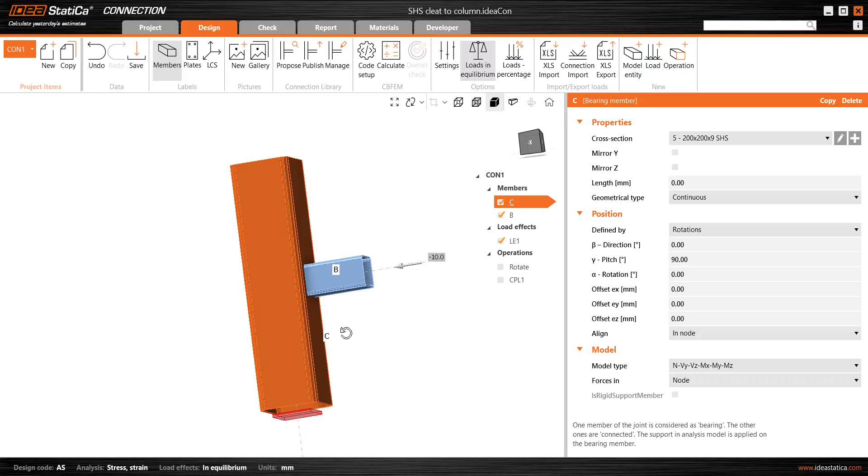It's a relatively straightforward arrangement. I've got a 200 square hollow section column in a vertical orientation and an incoming brace or strut, a 100 by 100 square hollow section. If we attach a connection using a welded cleat to the column and similarly a welded tongue or cleat to the square hollow section, then we find that typically by default we'll have the cleat in a vertical orientation, and the question has come in a few times: how can we rotate that and have the cleat in a horizontal arrangement?

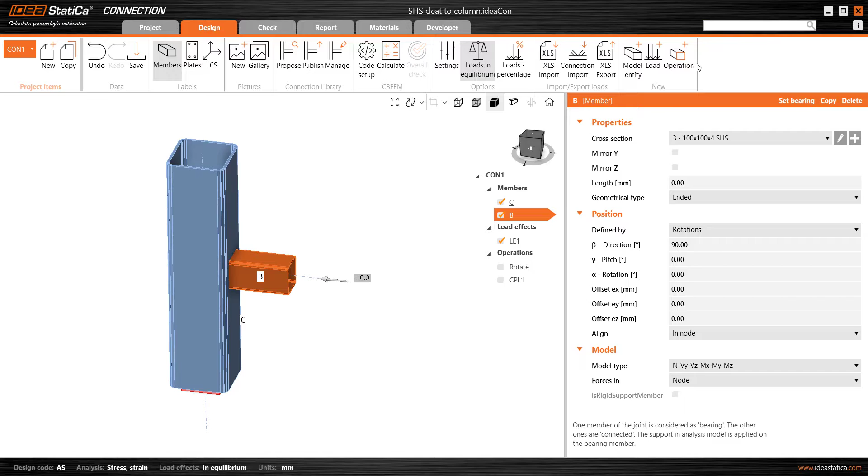Let's have a look at some options that we might try here. So selecting the operation tab from the design menu, we could try a range of different types here. Of course, we can always go back to a very manual setup, but we try to avoid that, simply for speed in setting up the connection details.

We could arrange a plate and weld it to the face of the column, arrange it in whatever orientation and cut it and add welds and add bolt groups and so forth. Similarly, adding plates to the strut itself.

But let's try some more automated operations, and we might try the gusset. We find that we get reasonably close with that, but we don't get control of the rotation. There's some details there that don't quite suit our requirements on this occasion, and similarly the fin plate operation isn't suitable here either.

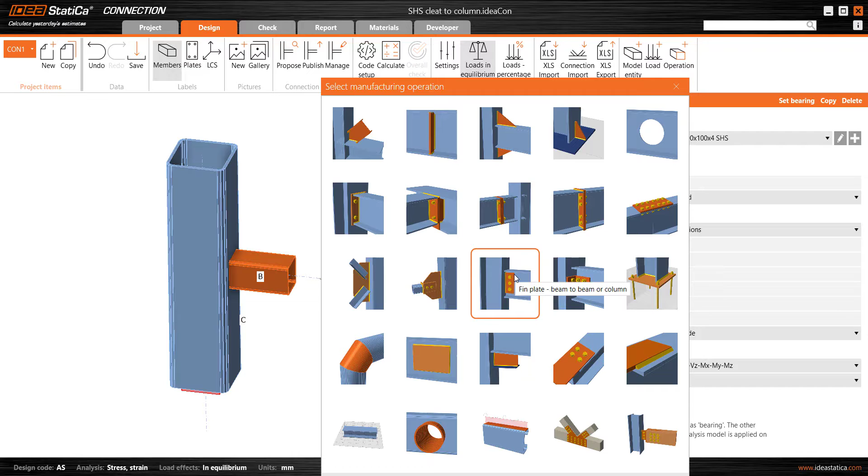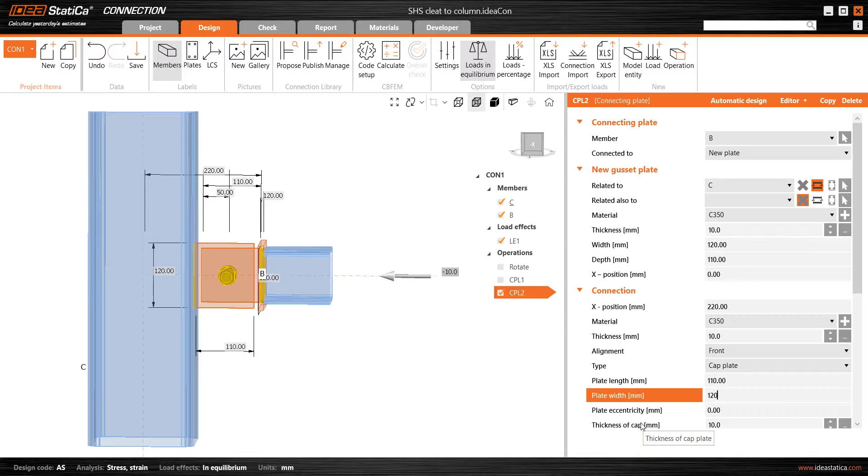Let's try the connecting plate operation, and the setup looks reasonably close to what we want, except we want a different angle of rotation compared to that diagram there. And by default we get quite a deep welded cleat to the column, 250. I'll go to 120, and similarly for the width of the welded tongue there as well.

So I could change the bolting arrangement so we have 2 or perhaps a pattern of 4 bolts. That's all in the bolting details, so I won't go to that at this stage.

But something that might be relevant is the exact line of these members, and depending on the situation, applying some of these connection operations may shift the position of the member slightly, may shift the alignment. So something I like to just be aware of and try to control, particularly if we want to maintain the concentric nature of the connection, is this alignment.

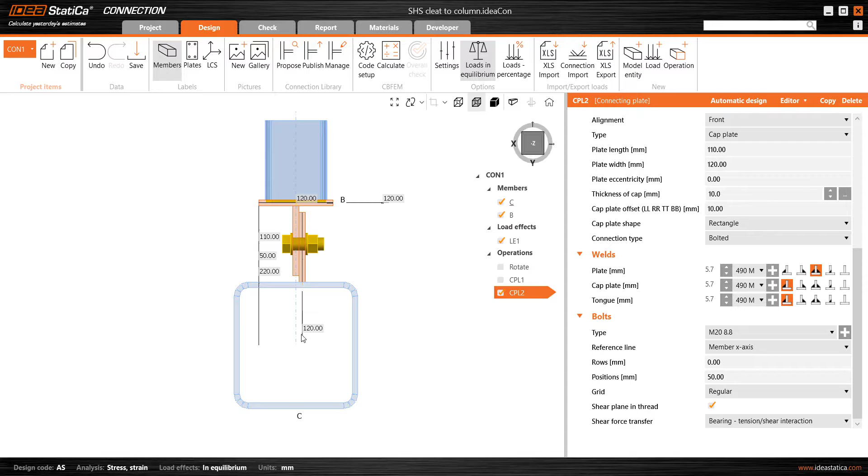Going into a plan view and a transparent view on this occasion helps us identify that indeed we do have a concentric nature here of the strut coming into the column. The welded cleat on the column is off to one side, and the tongue is central with respect to the cap plate. And with that connecting plate operation, we could try some different details here.

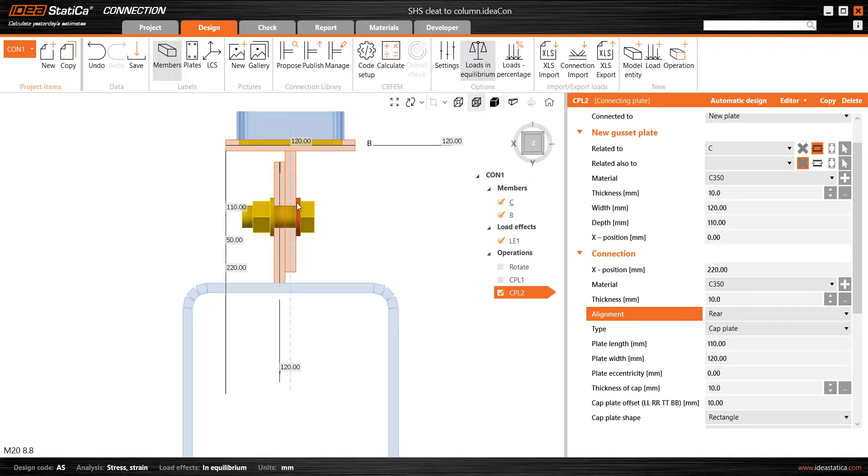It might be that you want the plate to be on the other side. That's fine, it's the same sort of setup. We still have a concentric arrangement of the members.

And we could also try some other details, such as a cap plate times 2. Now the tongue, each side slightly of the centre, that's fine. Everything is centrally aligned here, so that's quite a good option. I guess if that's the sort of setup you want, your bolts will be in double shear.

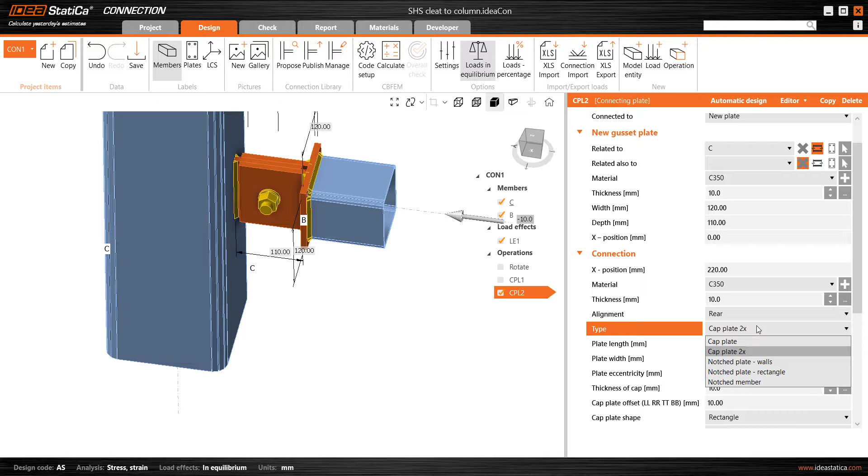And another quite nice option is a notched member like this. There's a few other options there which I don't think would be used quite as much. The plate itself is notched in different ways, but the notched member is quite a good detail, fairly commonly used.

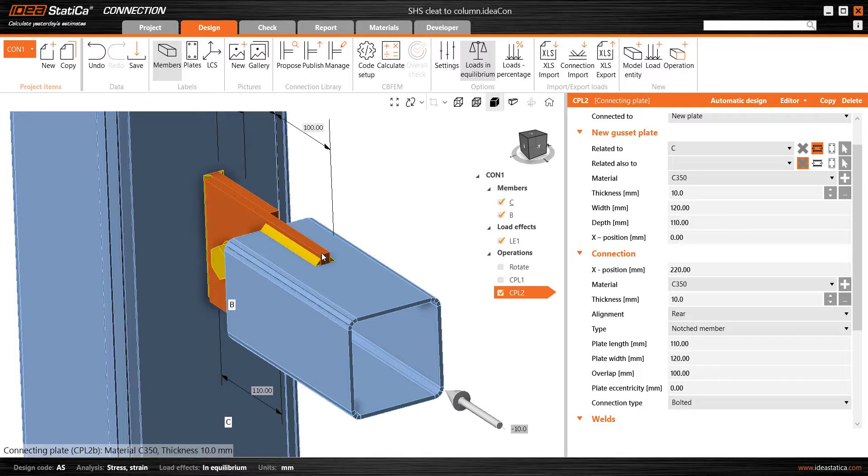And just to confirm the setup, I've selected this window, hovered over this welded tongue and pressed delete, and by rotating this around we see in fact the member itself has been notched as we require. As I say, there's some other details that don't do it quite in that way. All right, resetting the view like that.

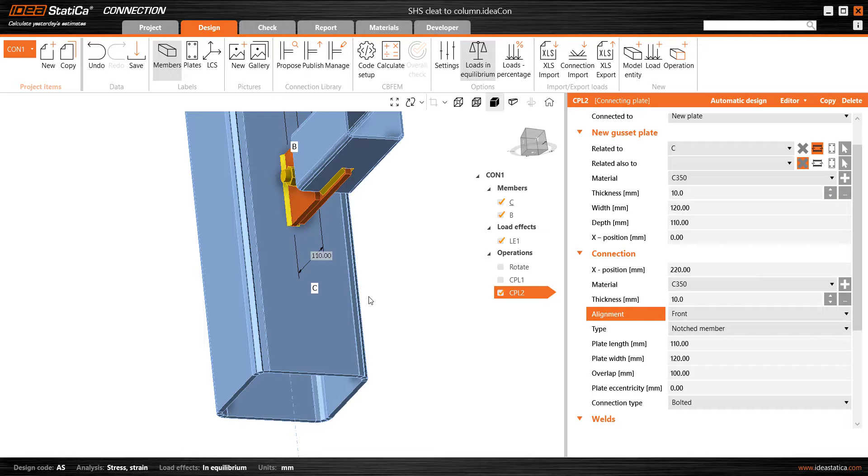So that all gets fairly close to what we require, except we find that we can't control the rotation of this connecting plate operation.

Something though that is interesting and we'll utilise is that we are connecting here to a new plate. By default, the software will do that, but we see we can also do a new plate times 2, so that's another option there. But we can connect to an existing plate.

So this starts to give us some ideas of how we might go about this. If we have an existing plate, we could try having that on a different orientation and utilise that plate or member, say a flange of a column or something like this for the connection directly.

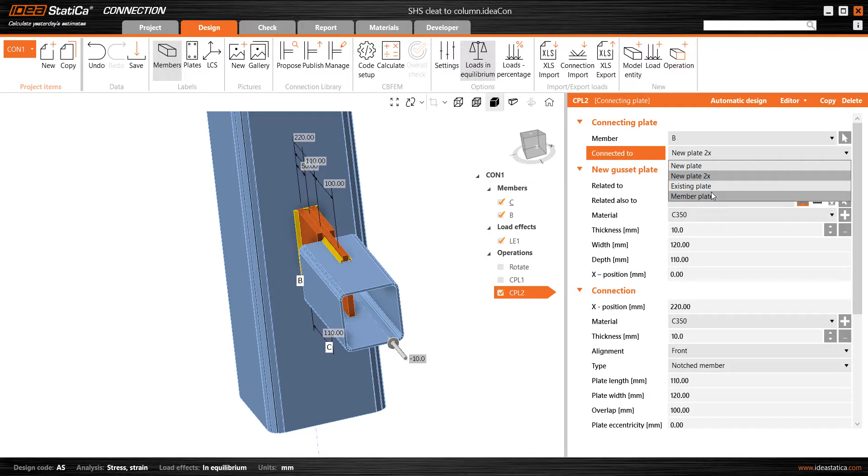So that's what we'll try. In this connecting plate operation, we see that we're connecting B, the strut, to the column, and the related member is the column. In fact, the orientation of this connection is based on the related-to item.

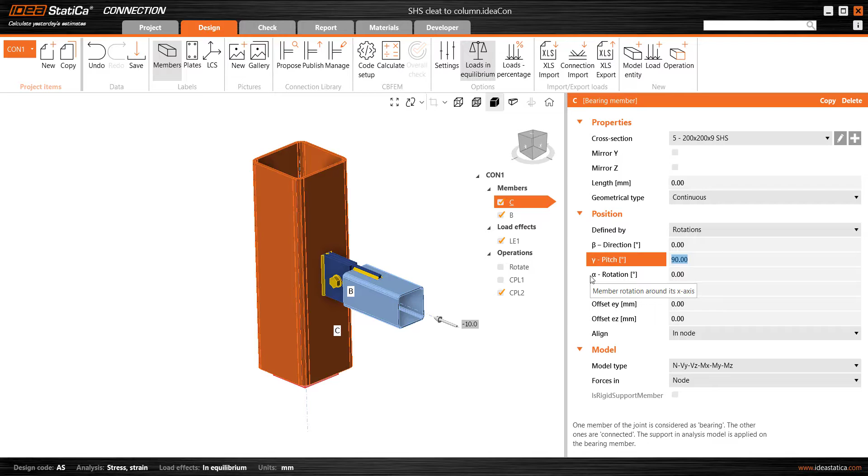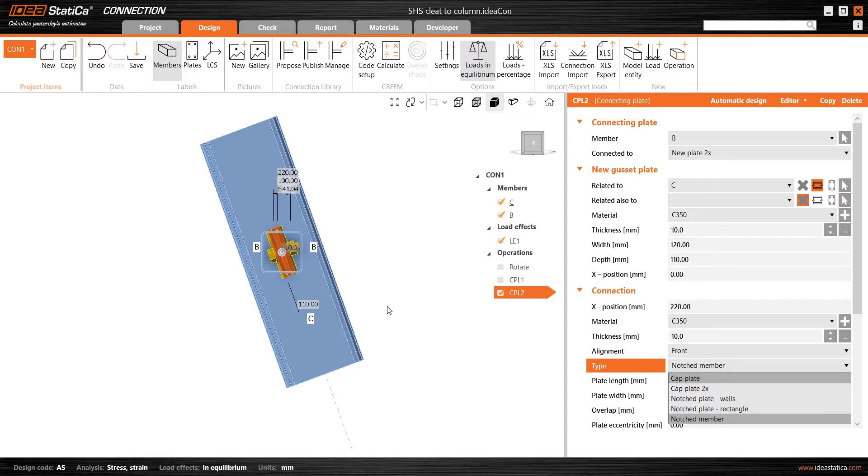If we select that column and change the pitch to say 70 degrees instead of 90, we see that the cleat has followed the direction of the column, and the notched plate is moving within the cross section. Here's the horizontal view, and that connecting plate may also be perhaps a cap plate, with orientation rotated in sympathy with the column pitch. That might be something we'd like to make use of at some stage.

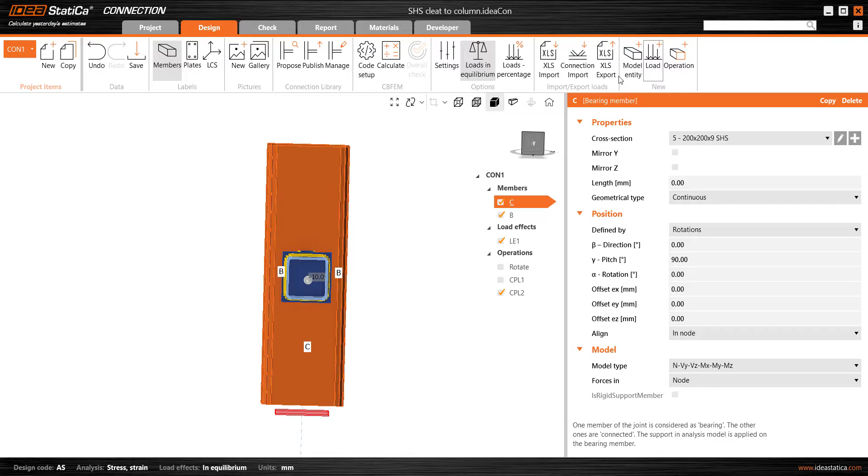Let's see how we might utilise some of these options in rotating the connection. First, I'll go back to the 90-degree orientation, the home view, spin that around, and I'm going to untick, or we could right click and delete, that operation there.

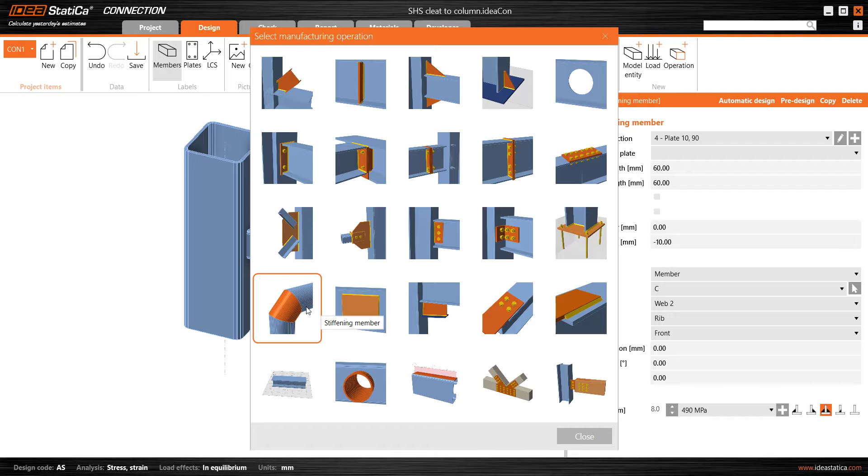I'm going to turn on this stiffening member operation. I mentioned before that we could connect to an existing plate or existing member, and that's what I've set up here is a member. We've got a stiffening plate and a stiffening member, and these are very similar in concept. It's simply that a stiffening member could be of a cross section, such as a universal beam, a parallel flange channel, a hollow section, or a custom shape, or a simple shape such as a solid rectangular section, and that's what I've used here. So I've got a stiffening member, and turning on the transparent view, it's of a suitable dimension like that.

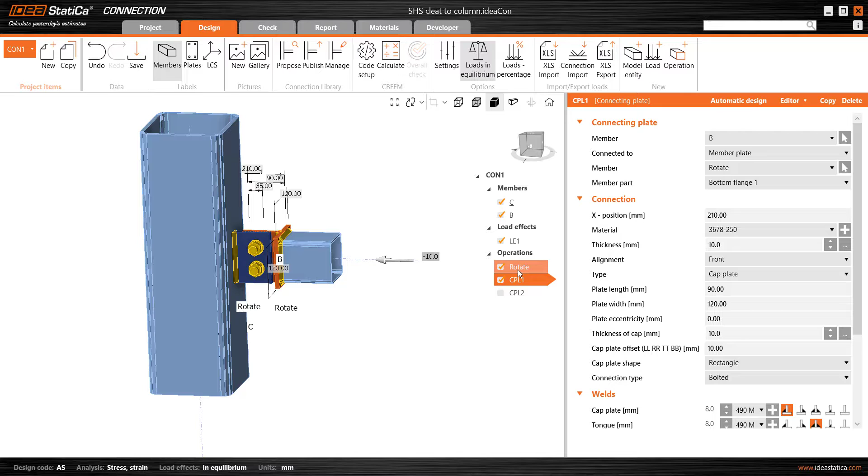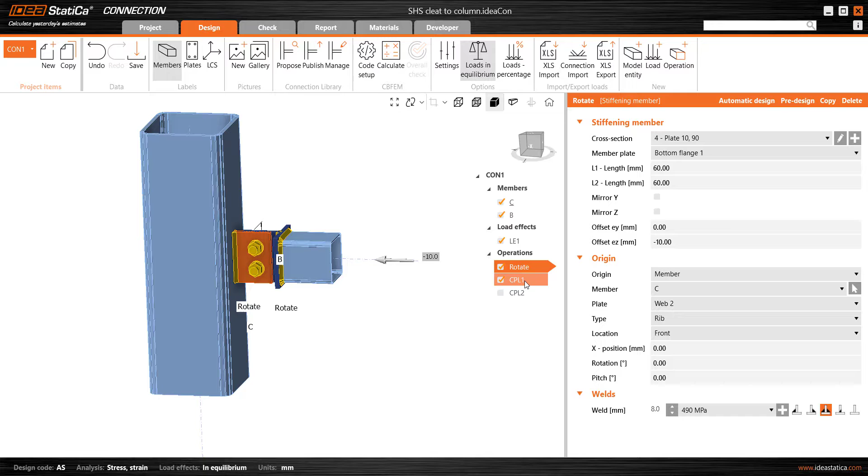In the connecting plate operation that I'll use, I'll tick that on now. I'm connecting to the stiffening member, which I've renamed to 'rotate' — it's just a clue for me to identify the item I want to rotate when I want to rotate this connection. We can right click on an operation and rename it, which I've done from SM1 previously to rotate. So we see for this connecting plate operation, the one I'll actually use in this connection, it is connecting member B, the strut, to a member plate, a stiffening member named rotate, and I'm connecting to the bottom flange. So this tongue is with respect to this stiffening member.

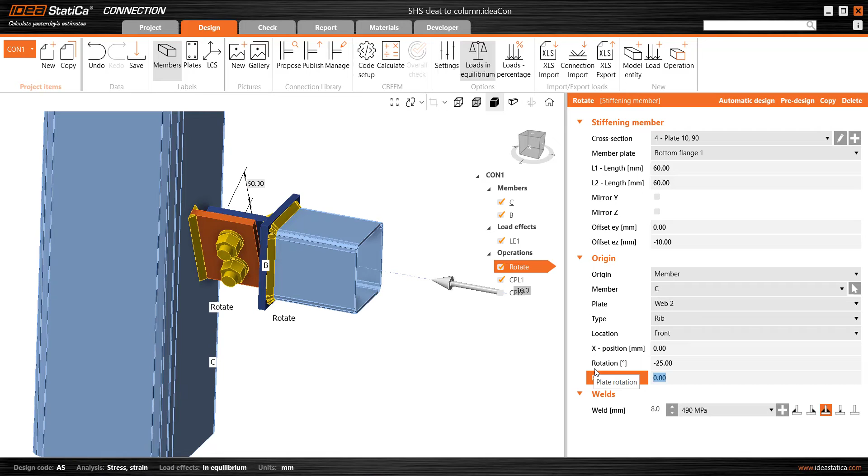When I rotate the stiffening member like this, minus 25 degrees for example, we see that the components rotate as desired, and minus 90 would be the typical arrangement that we would use.

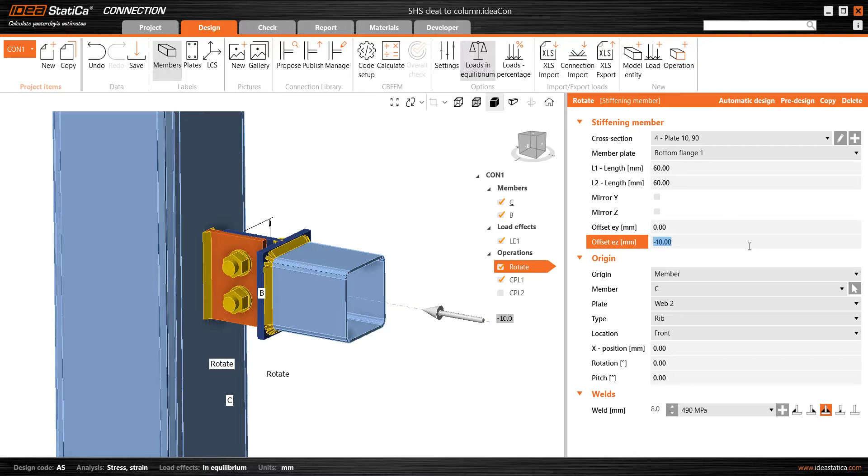By the way, I used a stiffening member instead of a stiffening plate here because we do have this option to introduce a horizontal offset. With a stiffening plate, we don't get that option. So when we look at a plan view, the stiffening plate set up as a rib with respect to this face of the column would be in the center, and it's then either shifting the tongue to one side or perhaps shifting the entire member, say 10 millimeters horizontally. So the stiffening member has that extra option in terms of positioning such that we can achieve the details we want.

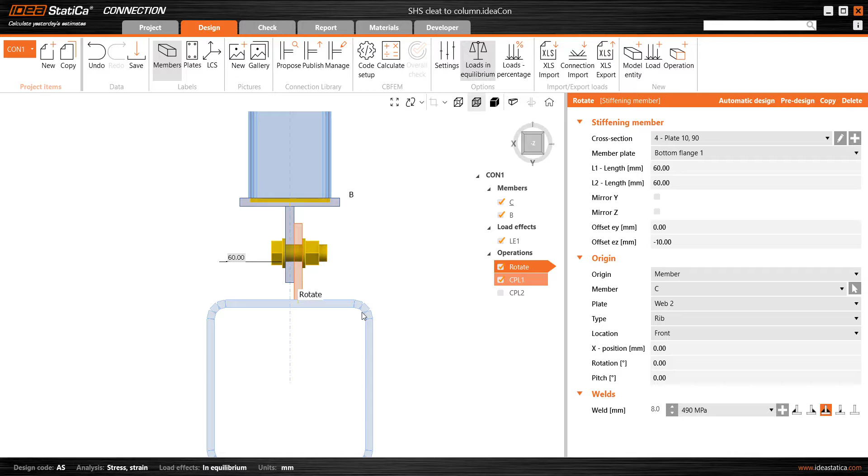All right, so that's the first example. Just to finalise the position that we require, minus 90 like that. And of course we could calculate this and make sure everything is working fine.

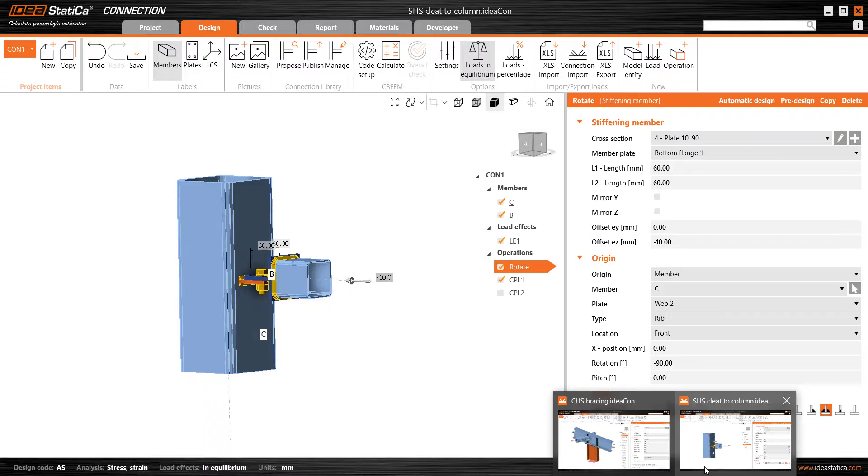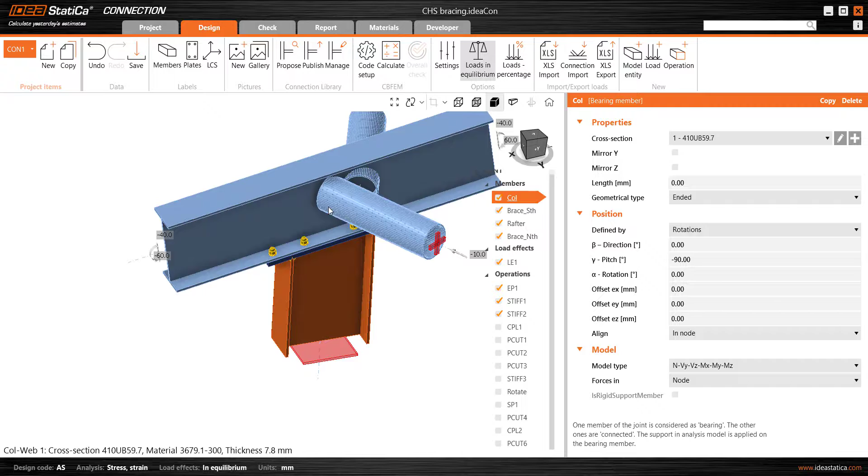All right, the next option is here. We've got a universal beam as a column, a 410 UB60, grade 300, and a 360 UB51 as a rafter, and a couple of stiffeners on this side of the rafter. You would of course have them on the other side as well, but when we come to looking at this connection, I'm just keeping things a little bit clear for clarity.

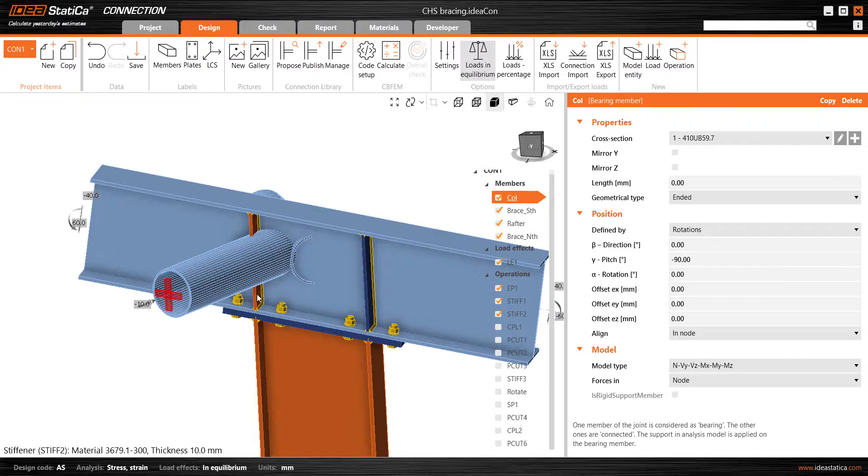Okay, so this was a support case. A couple of similar questions have come in to our support desk, and the question is, how can we use a stiffening item, a stiffener in the connection, as a cleat so to speak for the incoming bracing members, and how can we rotate that? But when we select that stiffening item, we don't see any rotation opportunity here. So in that case, I'm going to untick that.

By the way, we've got a stiffening operation here. Instead of it producing all four stiffeners, it's set to be the lower part only and on one side only, hence the second stiffener operation to set that stiffener up previously.

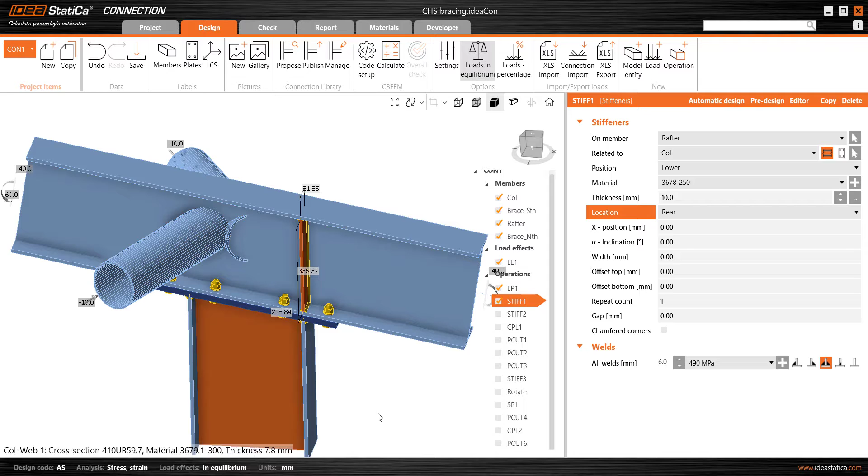So I'll turn on this connecting plate operation, and here again we see quite a deep cleat, which I don't want on this occasion, and I'm going to cut that back in a moment. That will follow the direction of the brace here, and we see that I've set it up as the related member is to the column. So if we want this vertical in line with the direction of the column flange, we can use the column as the related member.

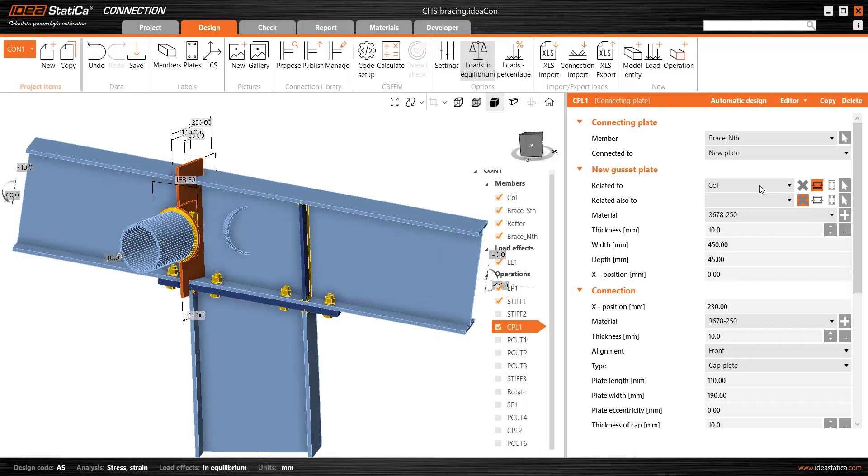The other option here is to use the rafter. This is on a 10-degree pitch, like this. So if we want the connection to be in that direction, parallel to the rafter itself, we could use that. But I want it to be vertical, so I'll switch it back to column.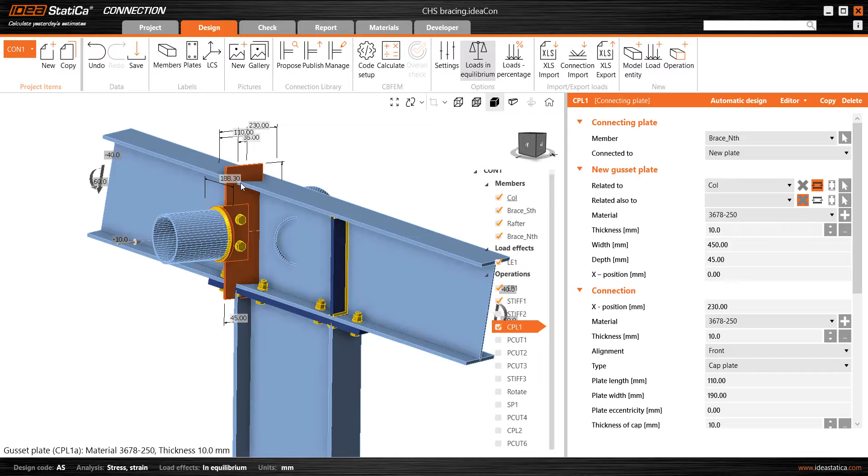This is somewhat interesting, I think, that we are using another member that's in the connection for the related item, but I'm not actually connecting it. In fact, by default, the face of that column is a little bit thicker, 7.8 millimeters compared to 7.3. So the full extent of that plate width would not, by default, reach the face of the rafter. In fact, it's defaulting to the edges of the flange, so we need to extend that a little bit.

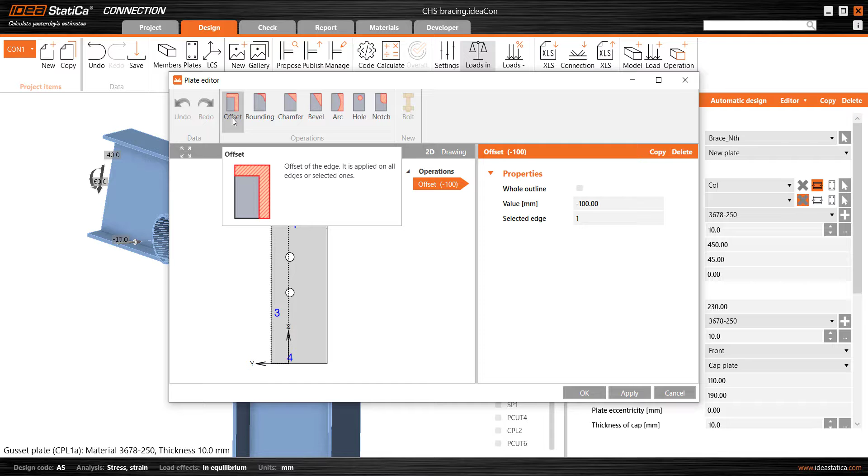By right-clicking on this, we can use the editor, and you can see I've previously set up an offset here. With plates, we can round corners, bevel or chamfer off corners, add holes and other details. Here I've added an offset, and I've made that offset negative 100 millimeters. Just to illustrate, if I take out a zero there and apply that, we see it here, but it's not reflected in the model yet. If I apply that, we see that the width of that plate has only been offset 10 millimeters from the default position. So I'll take that back to 100 millimeters and OK on that.

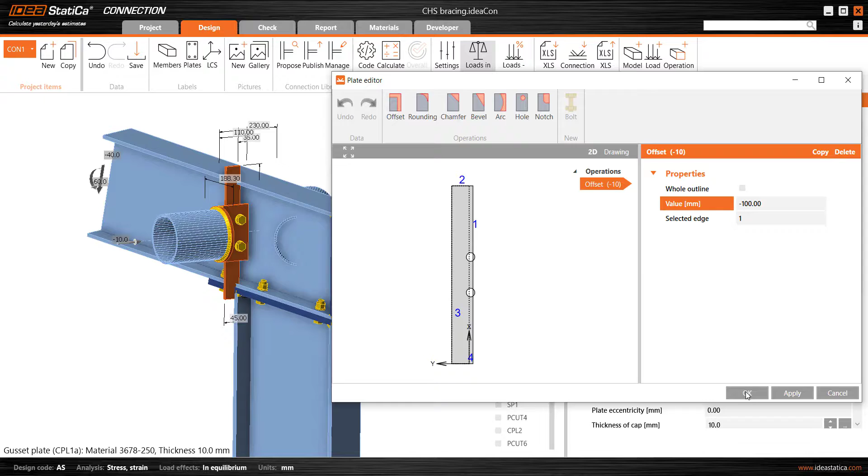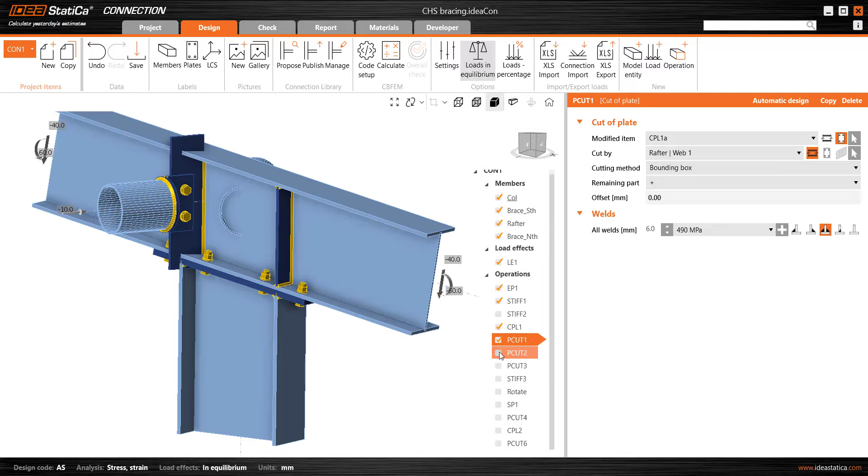And it's sticking through the far side at the moment, and top and bottom we need to cut that back. So that's the purpose of the next 3 plate cut operations. It's simply this operation here, so switching those on. One is a plate cut of 6 millimeter leg fillets each side of the rafter web, and then also to the underside of the top flange of the rafter and to the bottom flange there. So that completes the connection on this side.

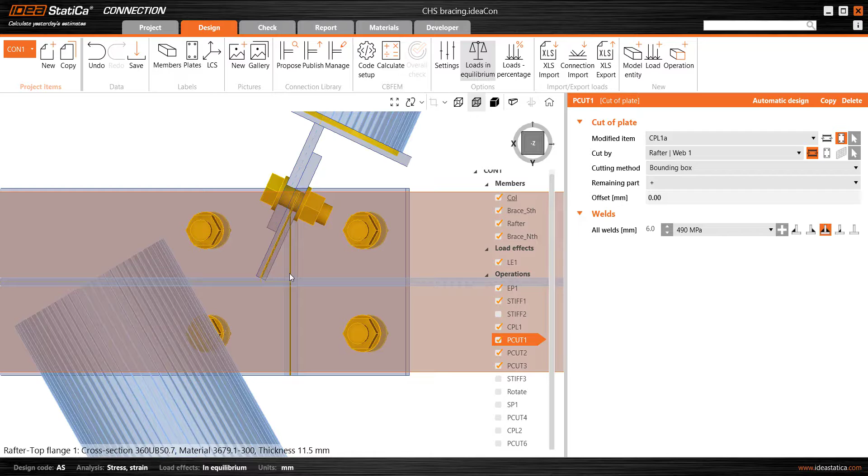We could look at the plan view like this. We can see that this welded cleat here is reasonably arranged above the flange of the column. If this member changes direction slightly, say 60 degrees, it's a little bit better arranged, so we can adjust some offsets and some angles and so forth to get this as desired.

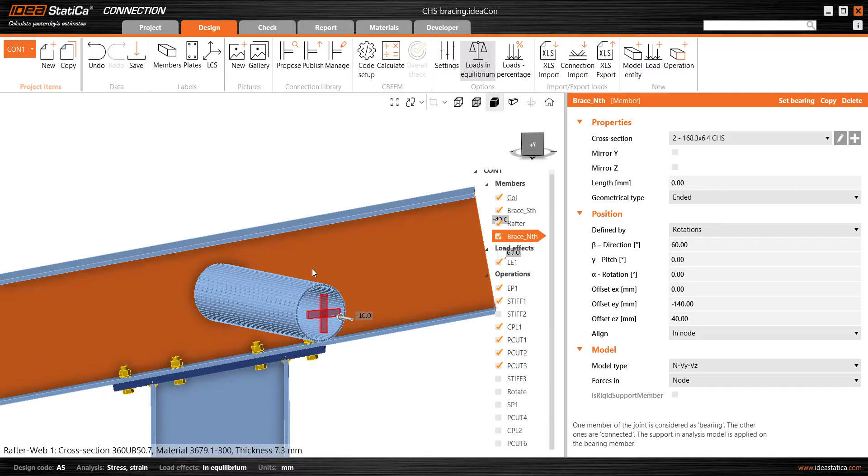All right, let's go to the other side, where I'm going to illustrate a method that you could utilize if you wanted to control the angle even further, and not have the angle of the cleats line up with any other member that's in the connection already. So I guess if we want complete freedom in the setup here, there's a way that we could go about it. It's perhaps not entirely perfect, and you'll see what I mean by that.

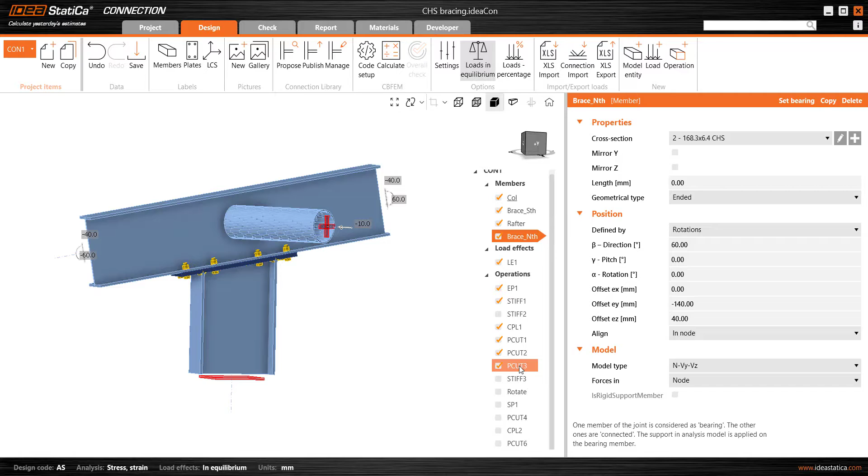We do have a bit of residual plate that's not going to be a real item in the connection, but I think that would have a negligible effect on the capacity and would be a reasonable way to go about it. All right, let's first of all turn on this stiffener operation.

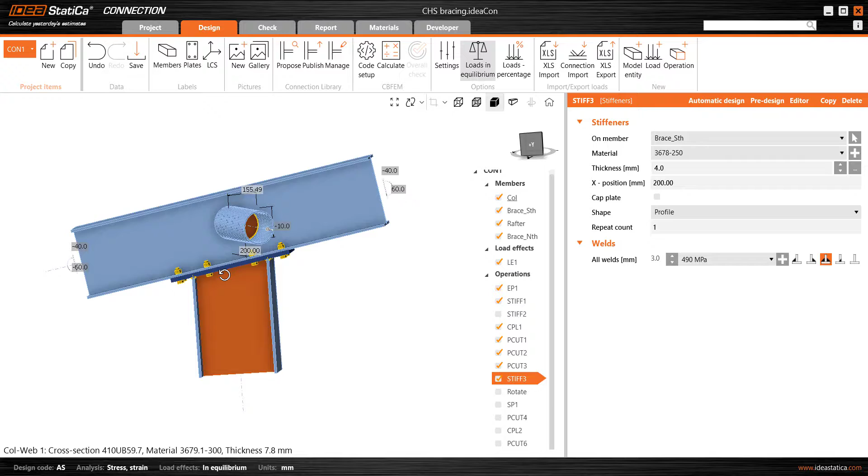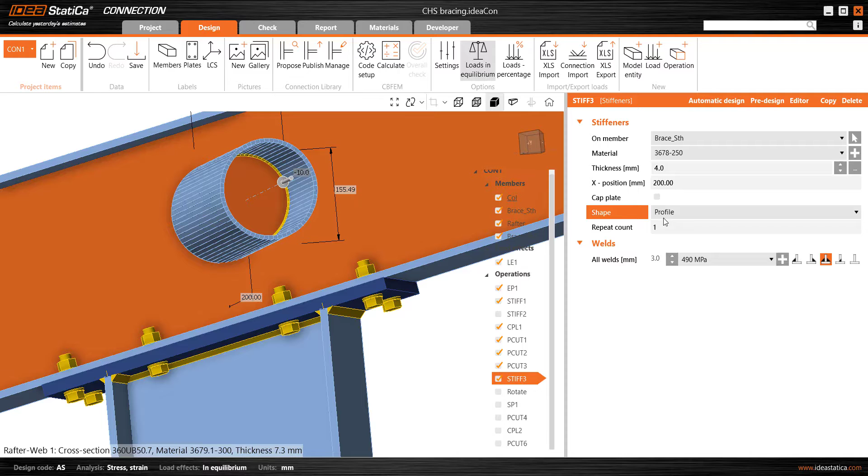So just like these vertical stiffeners here, I've added another stiffener operation, but on this occasion it's an internal circular stiffener to this incoming member, which is the brace from the south. We see it in the transparent view there, or in the solid view we see it here. A 4mm thick, 3mm fillet weld on each side, stiffener using the profile option for the stiffener shape. A cap plate option could also be used here, but if you want to use a cap plate later, then you've potentially got a double up on that item. So that's why I used a profile stiffener like this.

And the purpose of this is that we want to have something which sets the direction for some other item, some tongues or welded gussets and so forth.

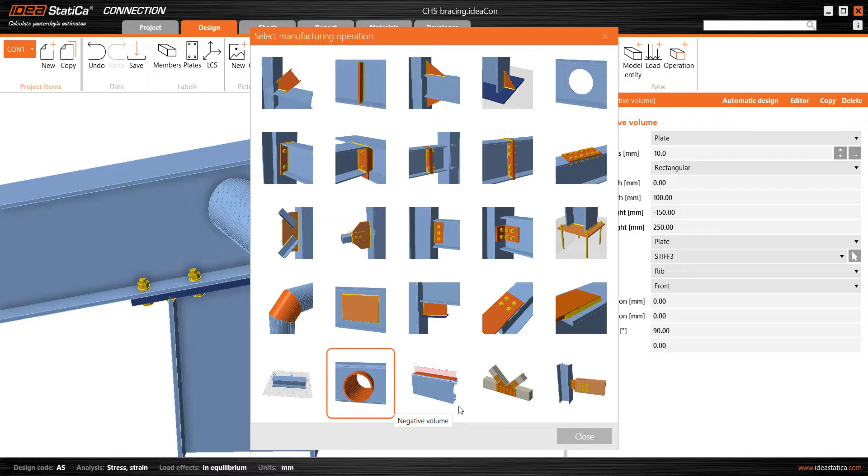So the next item I'm going to use is a negative volume here, and a negative volume operation can be set up. It's the bottom row of the operations list, and often you would use a shape such as a circular hollow section as a negative volume shape. You position it as desired, and then you can cut something else to that, or position something else using that negative volume. So the negative volume itself is not real. Let's turn that on, and I again have renamed that to rotate. So we see it's a negative volume and it's a plate. It could have been a member shape, and I've got a thickness.

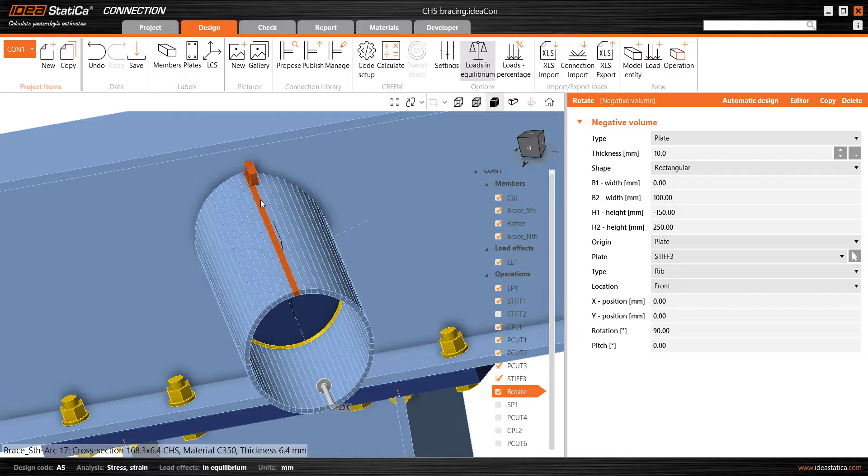Importantly, its thickness should be the same as the thickness of the tongue that we use later, so the sides of the real cleat will line up perfectly. We'll see that happening. So if you change the thickness of the tongue, change the thickness of the negative volume, everything works out nicely. Let's add the next one.

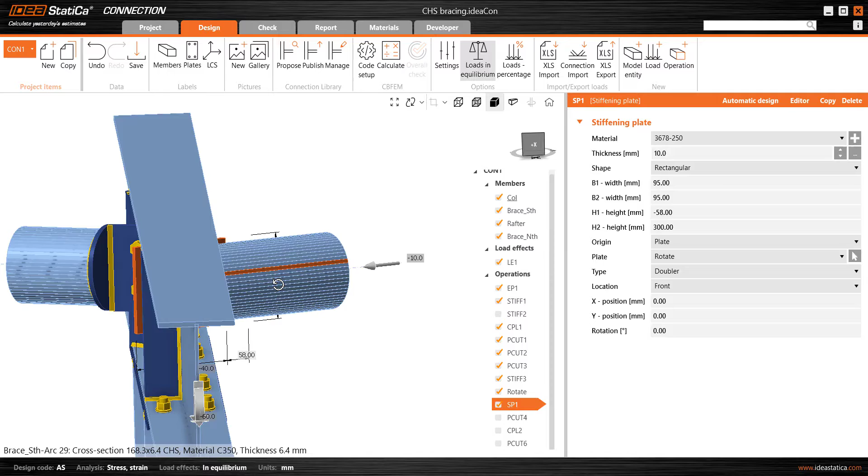It's a stiffening plate, and we see in the transparent view that stiffening plate, the extent of it, is actually coming through to the far side a little bit. The purpose of the extra dimension there is this might be on a pitch, and I need a bit more dimension so I can have a full weld down on this side.

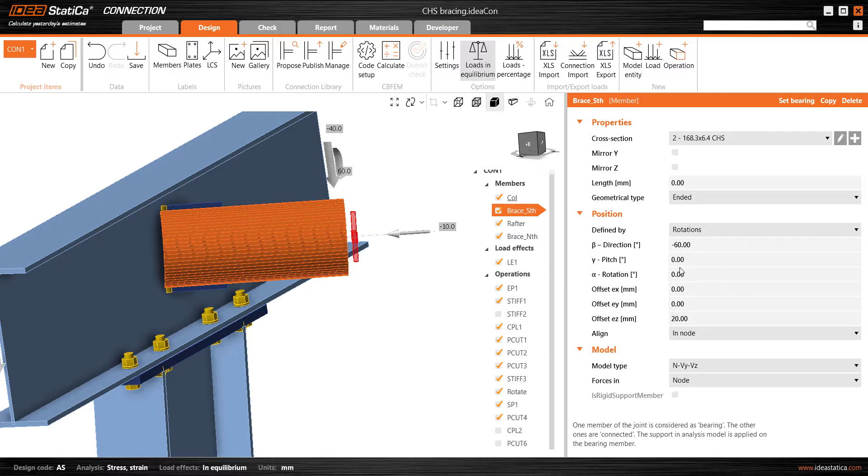It's a little bit arbitrary, but we're going to cut that plate in the next operation to the face of the rafter. To show that, I guess this might be a 15-degree pitch like this, and the plate is long enough that we get full extent of weld down that cleat.

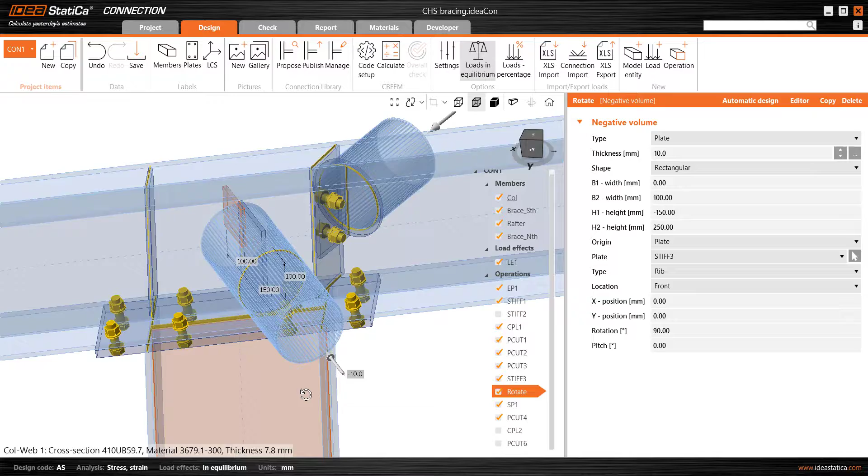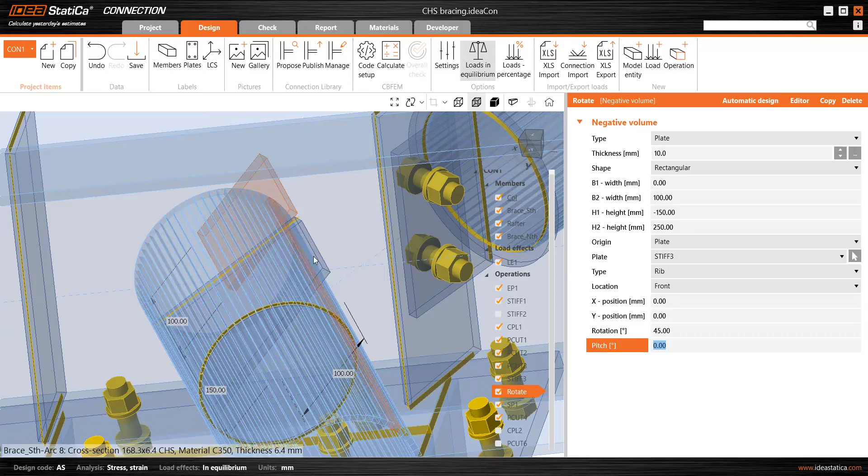Now let's go back to the transparent view and the negative volume operation. We see here that the stiffening plate is a doubler with respect to the negative volume. If we rotate that negative volume to, say, 45 degrees like this, the stiffening plate rotates with it, maintaining that orientation as it's a doubler.

So that's the idea here, where we've set up an interior stiffener in the bracing member. The negative volume is a rib with respect to that, and then the real cleat welded to the rafter is a doubler with respect to the negative volume.

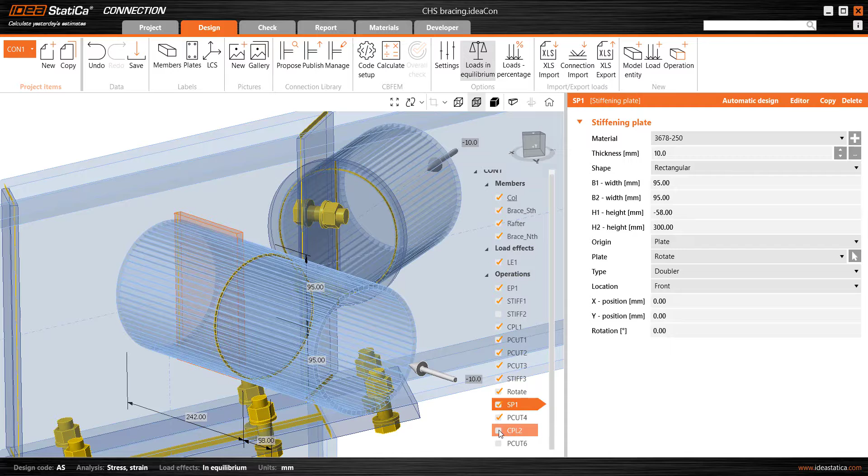So now we're finally ready to add a connecting plate. I've set up the details previously, and we see it here in transparent view - the same sort of details that I used before. Let's just right click on that and look at the editor.

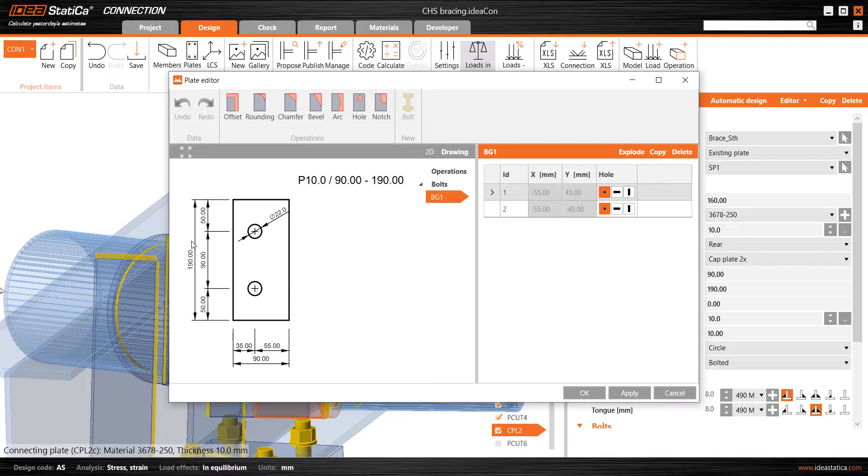A handy option there is to look at the drawing option here to confirm the dimensions that we've used, and the solid view.

So we've still got a cap plate times two. Let's just go back to a cap plate like that.

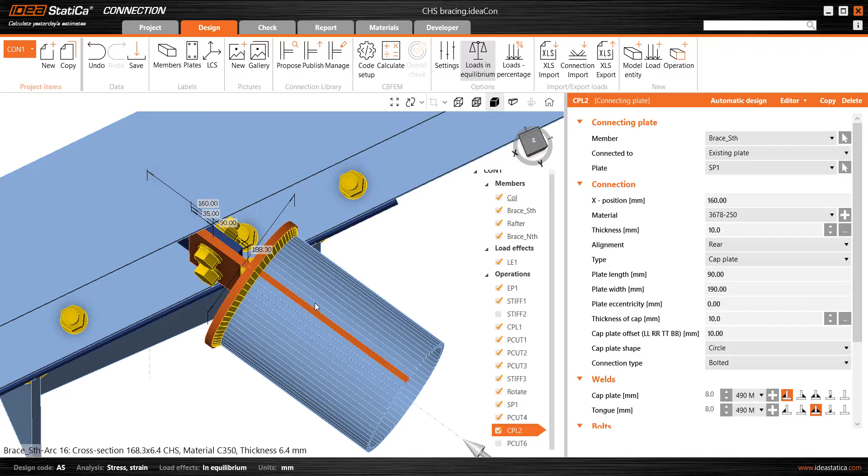And also we could look at any potential horizontal offsets and so forth, and make sure that we don't get an undesired lateral offset introduced if the detail defaults to doing that.

So the idea of the negative volume as a rib in the centre, with the same thickness as this tongue, is that the cleat will be offset with respect to that, and this tongue is still central.

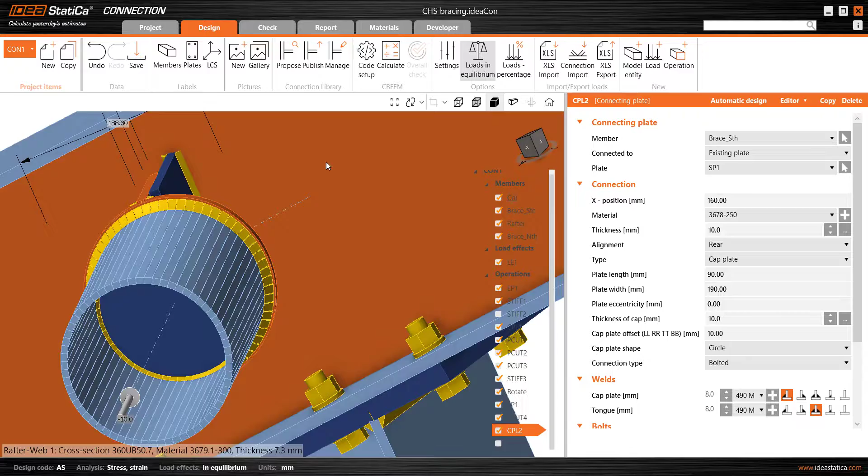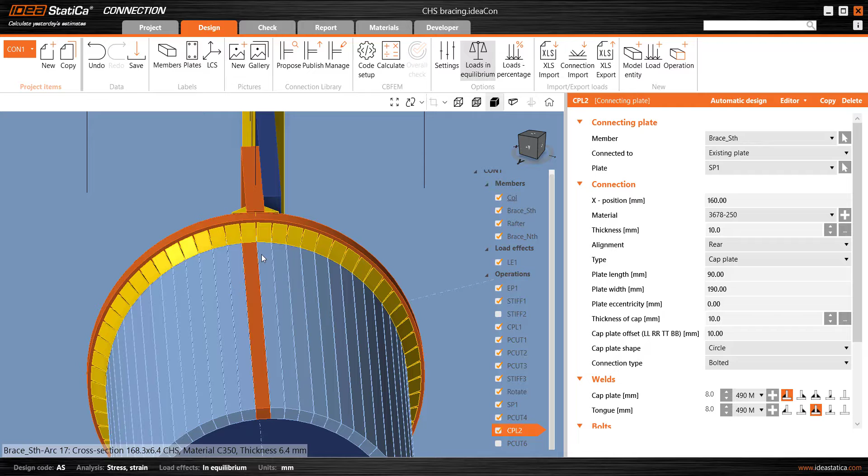If we hover over that arc, we see that it is arc 16, and there are 64 arcs in this connection. Let's get that angle right. The first arc is down here, and for the first quarter we've got 16, so this line between arc 16 and 17 represents the very centre.

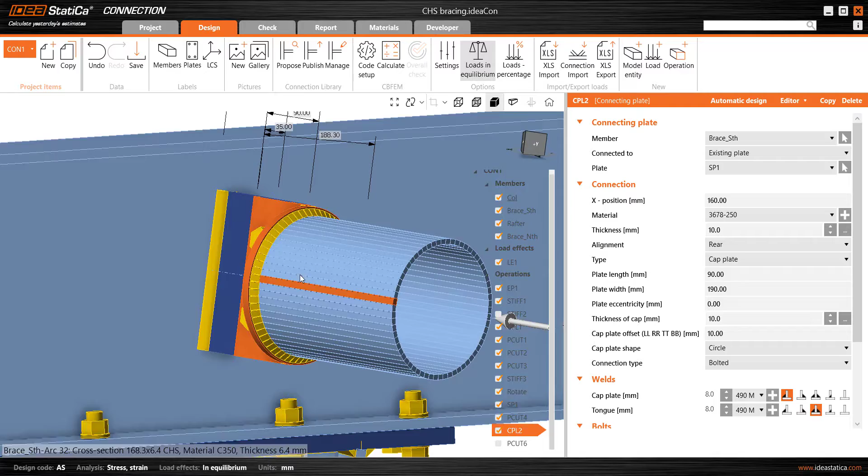So this tongue is welded to the very centre of the bracing arrangement, welded onto the cap plate of course, and the doubler SP1 is off to the side. That's part of the detail of setting this up. It's up to you, of course, which offsets, if any, you're happy with.

All right, and finally, we don't really want this interior stiffener here, so an option is to cut most of it away. What I've got here is stiffener 3, the first interior profile stiffener that I used on this particular connection, and this last operation cuts most of it away.

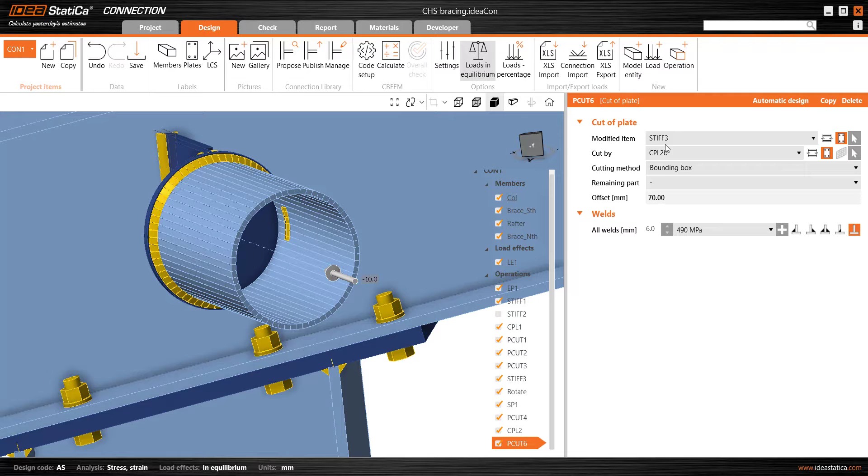So it's stiffener 3 cut by connecting plate 2B. I'll hover over that, and we see on the bottom left it is the tongue in this operation, and I've got a 70mm offset. So you could adjust that.

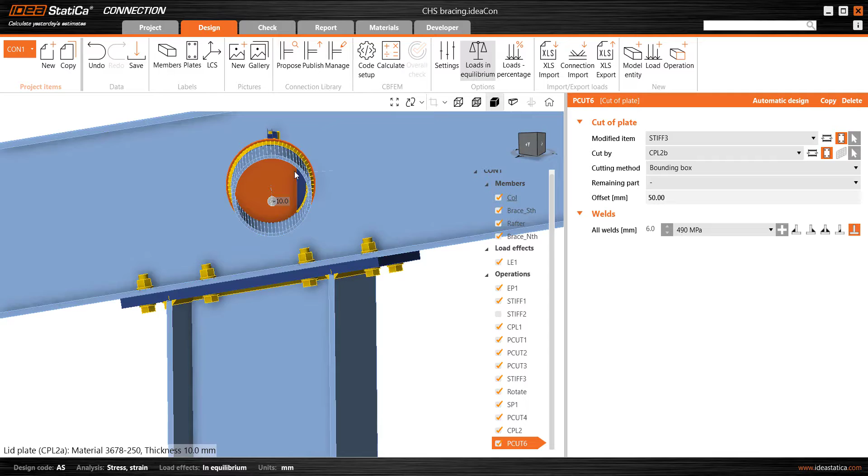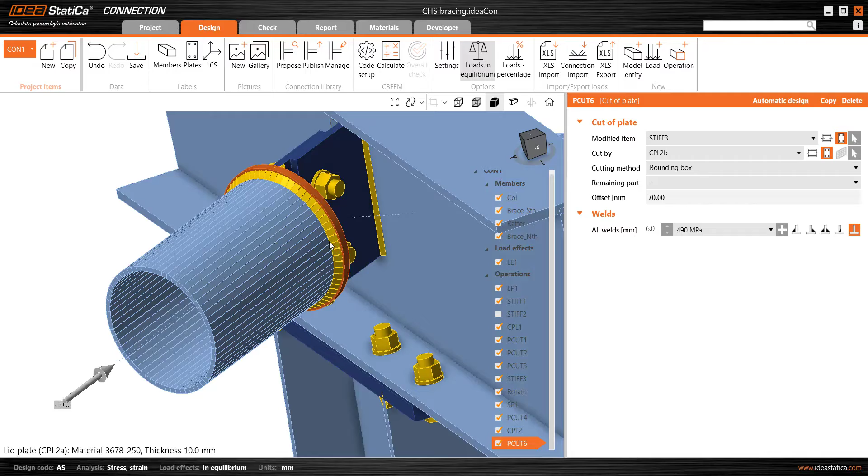If I only use 50 there, we see the remnant is that big, like that, or a different value of course. By using 70, I only have a small sliver left, and being on the side like this, most of the action in this connection is happening near the tongue, where that's welded to the cap plate, and the welds here. Off to the side here, it's doing very little.

So this would have effectively no effect on the connection capacity. It's simply required to set up the arrangement here of the various connection details.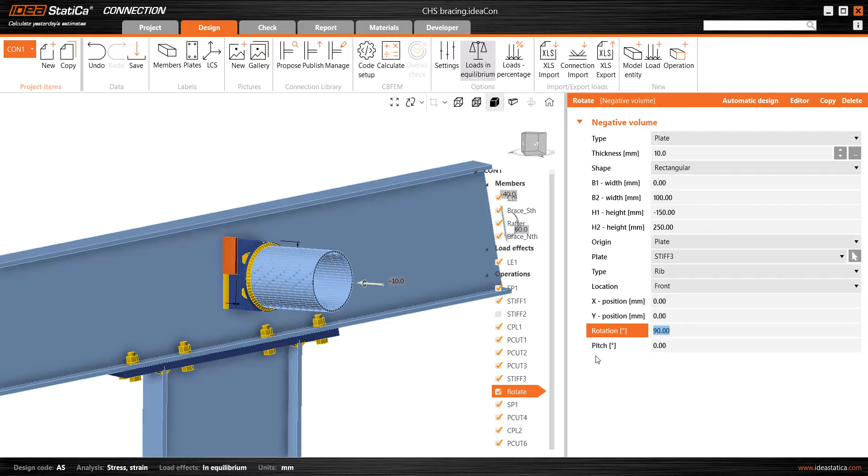So getting back to the main point of all of this: we can now use this negative volume and change its orientation as desired, and we can rotate it completely and have complete control of the orientation we require. As I say, that item there is not actually real - it only shows up when we select the negative volume, the rotate option here, and we're left with these remaining details.